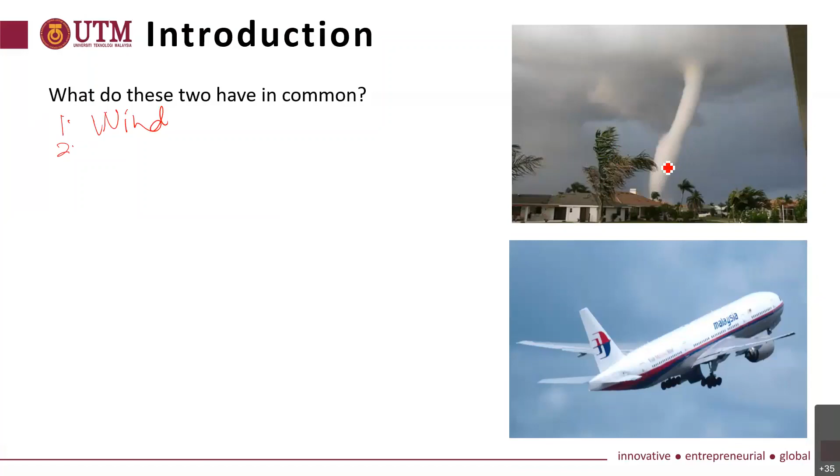Both can transport things. Izati says both can transport things. Yes, correct. Aeroplane can transport people, can transport cargo, things from one place to another. Hurricane also. It can bring boats, bring people from one place to another. Of course, we do not want that, but it can happen. So both can transport things or people.

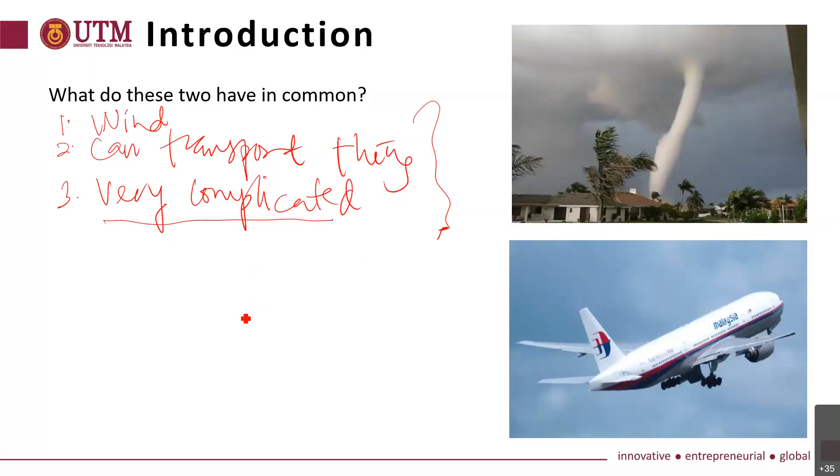Both are also very complicated. In control, if we want to model a hurricane, it will be very difficult. Of course, people are doing it. People want to predict what happens when it comes, for security, for safety. So people try to predict hurricanes. They have to model it. Aeroplane also we do modeling, we do analysis, we also do control. But as I mentioned, they are very complicated. Of course, there are many other things in common between these two. They are complicated. They are capable of transporting people, goods, and so on.

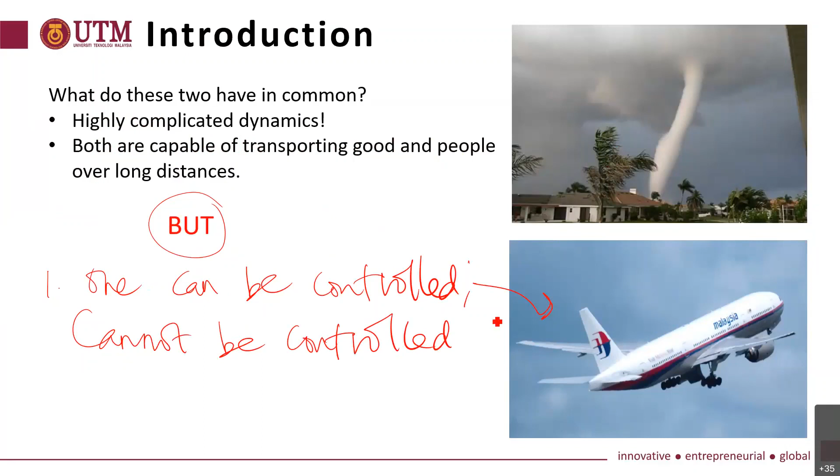But there is one big difference between these two. One can be controlled, and the other one cannot be controlled. The hurricane is God created. We cannot control it. And so this is the main difference. So if we have a system, in order for us to get benefit from the system, we should be able to control it. If we cannot control it, it can be useless, or it can be very harmful to human and to environment.

For example, another example is, let's say, power. We have power generated from many places, from solar. We have power, but if we cannot control the one that we obtain, it also cannot be used, or it can be very harmful, very dangerous to human. Okay? So some people say power is nothing without control.

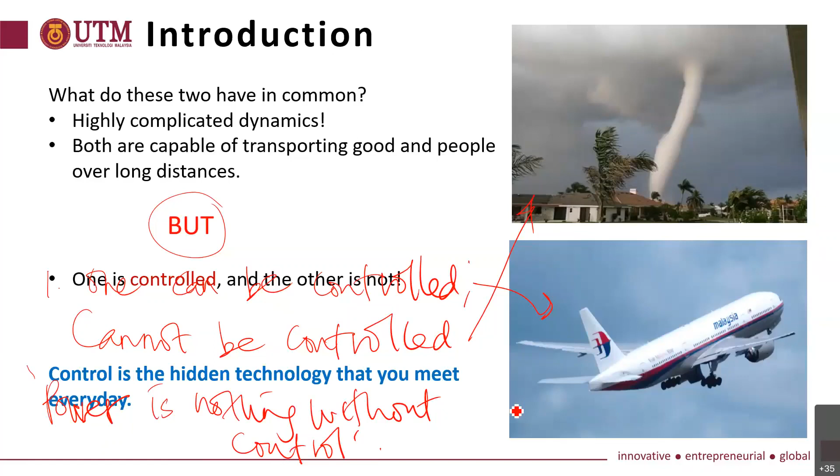Here I want to mention that power is also important. Not only the system that we develop or generate, then we need to be able to control that system. And you will see that control is the hidden technology that you meet every day. But because we meet it every day, we sometimes do not appreciate the one that we have. Okay, but in actual fact, power control is used every day in many systems that we use. Control is important, and we have it every day, everywhere in our daily life.

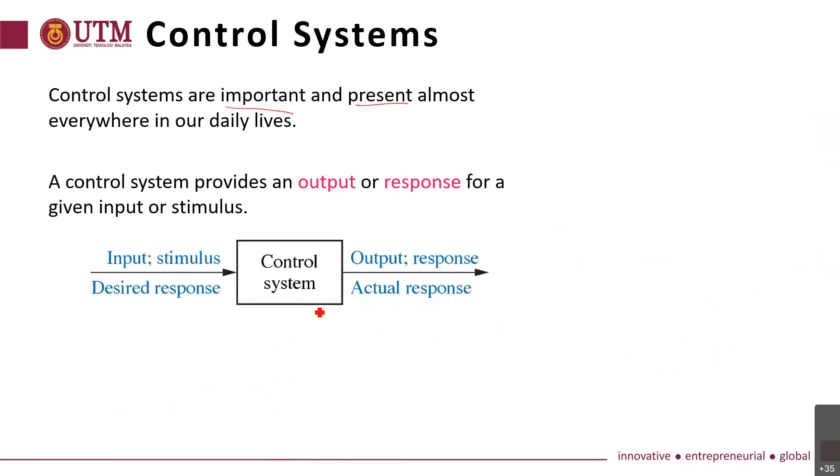The one here is the most basic block diagram. Mind you, the one that I'm discussing is the one that you also have discussed in SKEE3133. Okay. A control system is normally shown by a block diagram. Here is a system, and usually we have input and also output. Input and output. The input is also what we call desired response. Desired response meaning the one that we want, how we want the system to behave. That is the desired response.

When we excite the system with an input, we get output. The output is actually the actual response. The real one, the real response. And of course, we want actual equal to desired. Let's say I want the robot to move 1 meter. So I give input 1 meter. The robot moves, and a good robot will stop at 1 meter. That is actual equal to desired. And in that case, error will be 0.

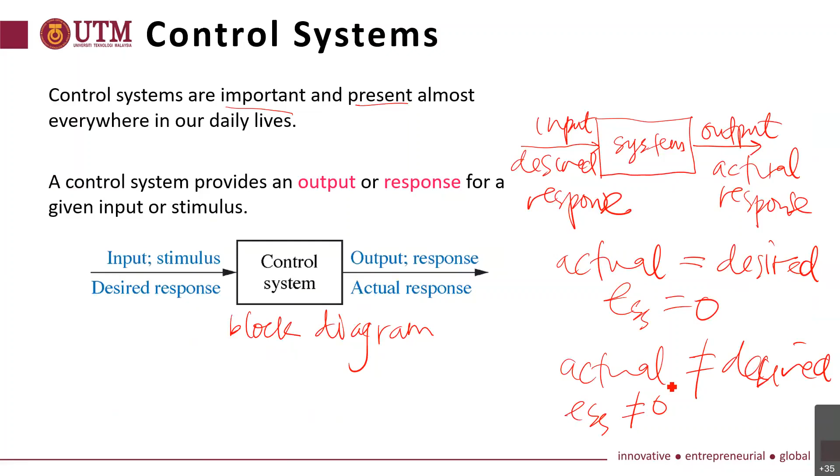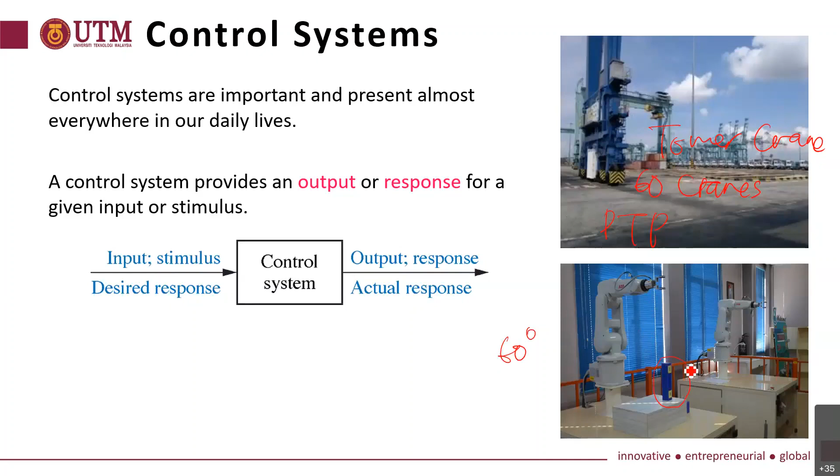And also robotics. In the robotic lab, we have robots. Robots also need to be controlled. Let's say I want this ABB robot to move 60 degrees in order to pick this material. So it has to move 60 degrees.

A good control system will make the arm move exactly 60 degrees so that it can perform the task. A not good one will be oscillating, maybe with an underdamped response, it goes to 65 degrees, then oscillates to 55, then it takes a long time to get to 60 degrees. Some other system, not good, we want 60, it moves to 50 degrees. Then we get error, and the robot could not perform the task successfully. So that is why we need control. We need an accurate control in order to perform the task.

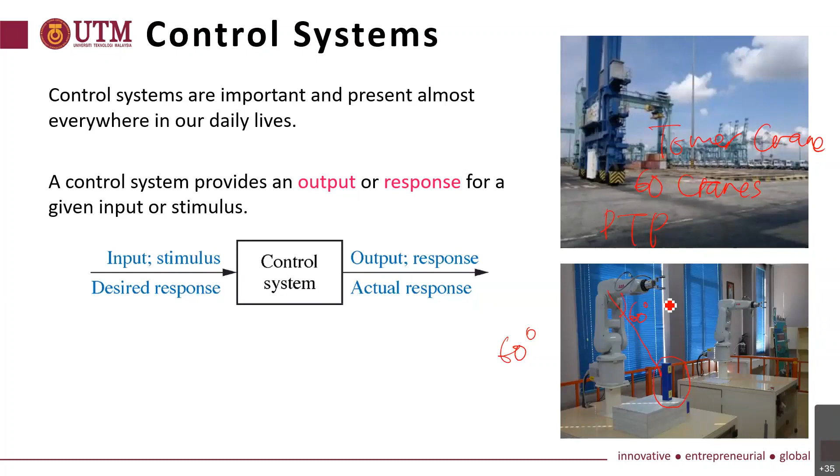Also, I think in the previous class, some lecturers gave the elevator or the lift as another example. When we enter a lift and the door opens, we normally press the level that we want. Let's say I want to go to level 20. I press 20. When we press 20, we are giving an input of 20, a step input of 20. That means I want to go to level 20.

Then the lift, from level 0, will start to move. Level 1, level 2, level 10, up to level 20, and stop. This is a very good lift. It can achieve the level that we want. A not good one will stop not exactly at level 20, maybe a bit different. Some even worse, move to another level. All those involve control systems.

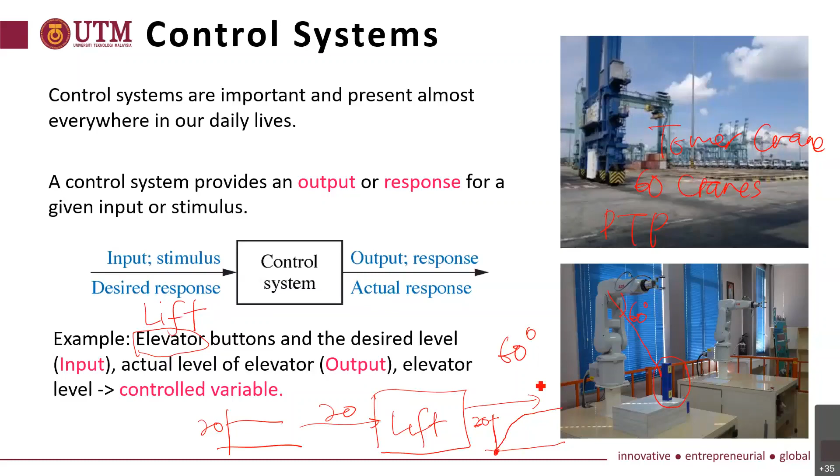And usually it is related to a motor, because a motor rotates that system. A big system like an elevator needs a big motor. A small system, a small robot, similar to the one that I showed in the lab, maybe smaller. A big crane system needs a big, high powered motor. But most of the cases are related to a motor. Of course, besides that, there are many other actuators, such as pneumatic and hydraulic, that are also related to control systems.

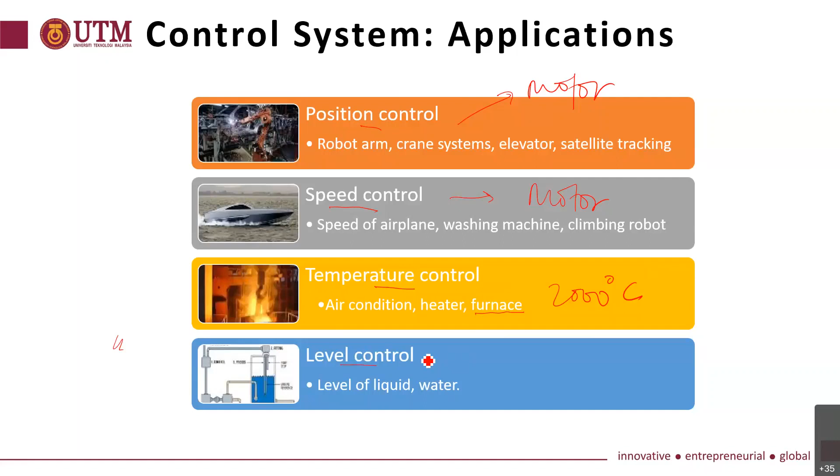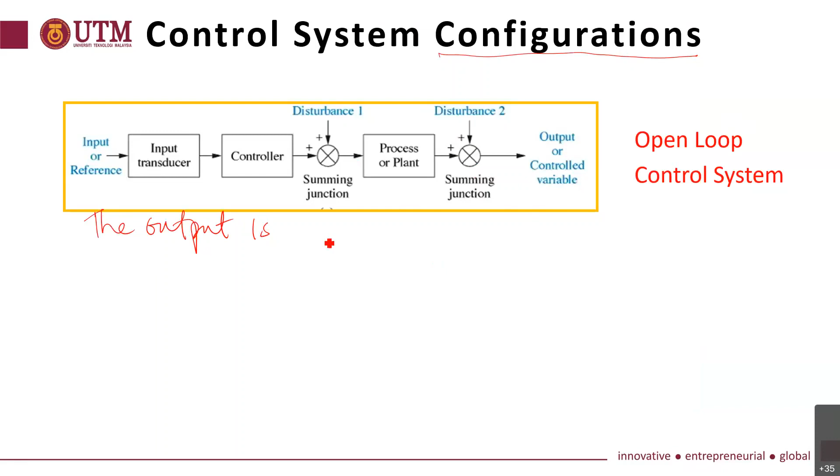Let's move to control system configuration. This is very important. The controller can be divided into two. I believe you know this: the open loop control system. This is the example that we gave in the lecture. An open loop system is one in which the output is affected directly from the input. That is one-way, straight from input to output.

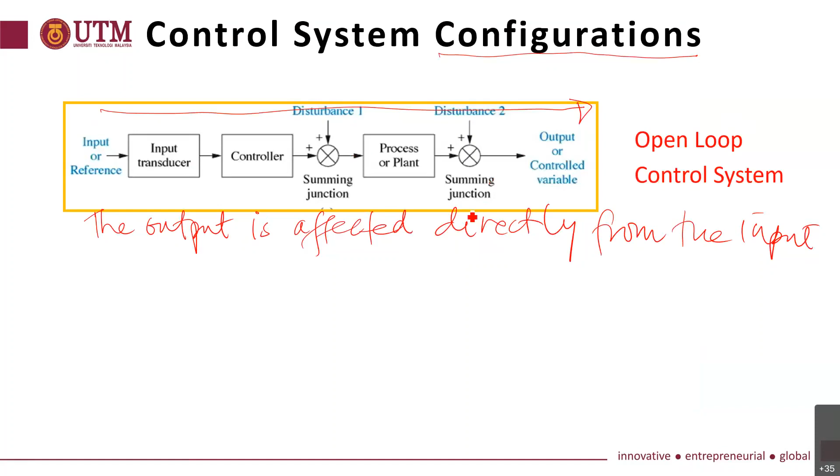If there are disturbances, in this case disturbance 1 and disturbance 2, the system cannot be modified or controlled to cater for the disturbances. So it is affected only by the input. So we call it an open loop control system. The other one is the closed loop control system, in which there is a feedback. We call this feedback from the output to the input, in order to check whether the desired response has been achieved or not. It will be modified based on what we call the error. Error is the difference between input and output. And based on this error, the controller will take action. So here is the controller. It takes action so that at the end, the output equals the input.

In this subject, in this course, the one that we will be focusing on is this block diagram. Controller. We want to design a controller so that we achieve the desired response.

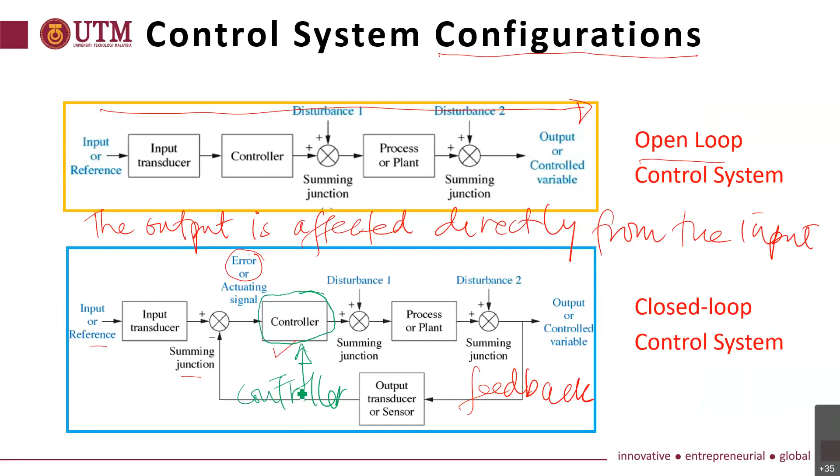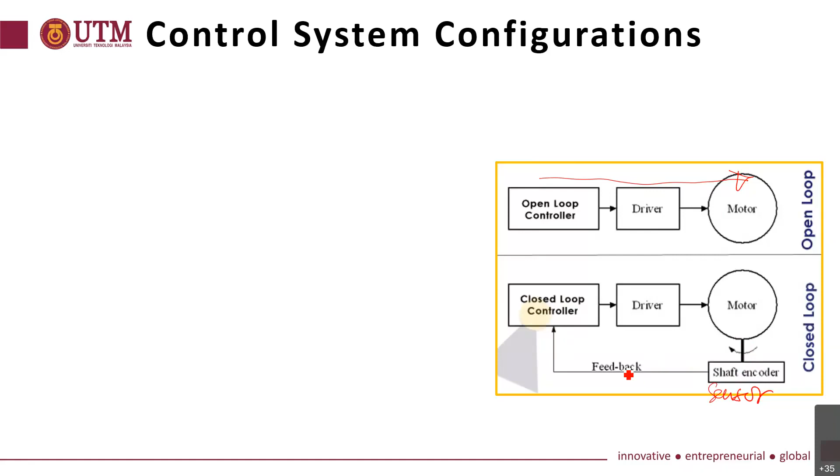In this case, they use an encoder to measure the angle of the motor, and the angle is fed back into the system, and the closed loop controller will take action in order to make sure that the actual response equals the desired response. And this is the difference between open loop and closed loop. I believe you know this.

Open loop is simple, it's cheap, but it cannot handle many complicated things, many disturbances. It is limited. In contrast, closed loop is complicated. It will be expensive as we need more sensors, more connections. It will be difficult to design. It may involve stability issues, in which the system cannot perform as what we want. But in general, they are good. They are less sensitive. They can handle disturbances, and can also be used for many systems.

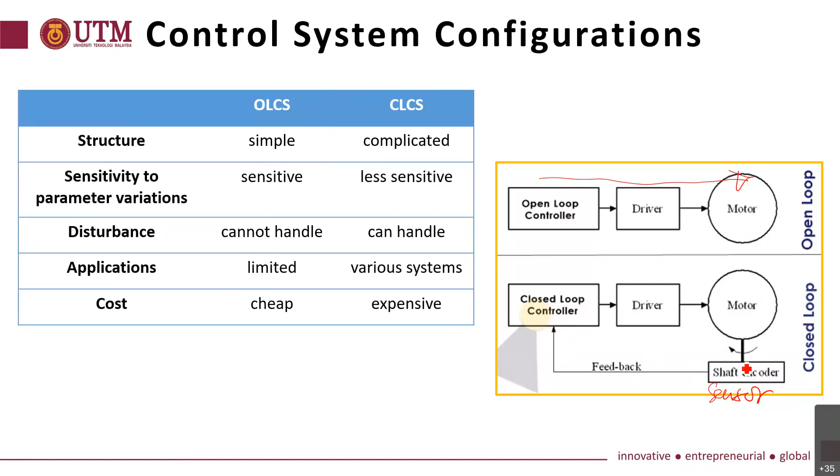Okay, let's see the specification of control systems. Control systems are dynamic. Dynamic meaning that the system is changing with time.

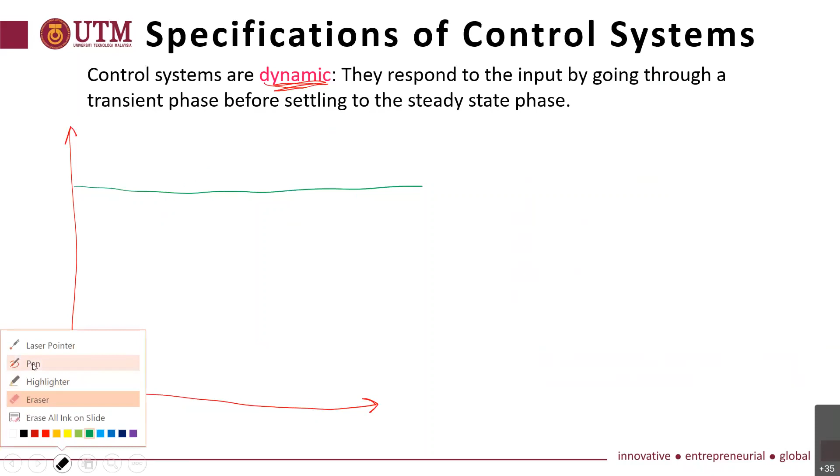If I can plot the response, let's say this is the input. Let's say we want 1. The input desired response is 1. Then this is the output. It moves from 0, increases to more than 1, oscillates, then it stops. This is the output, in time, in seconds. So this is what we call control systems are dynamic. That means it is changing with time. At 1 second, one point; at 2 seconds, a different point.

If we say this is a robot, at 1 second it moved to maybe 0.1 meter. At 2 seconds it becomes 0.3 meter perhaps. So it increased to maybe here, at 5 seconds. At 5 seconds, it moved to 1 meter. Then it oscillates, and finally it stops. So they are dynamic. Control systems are dynamic.

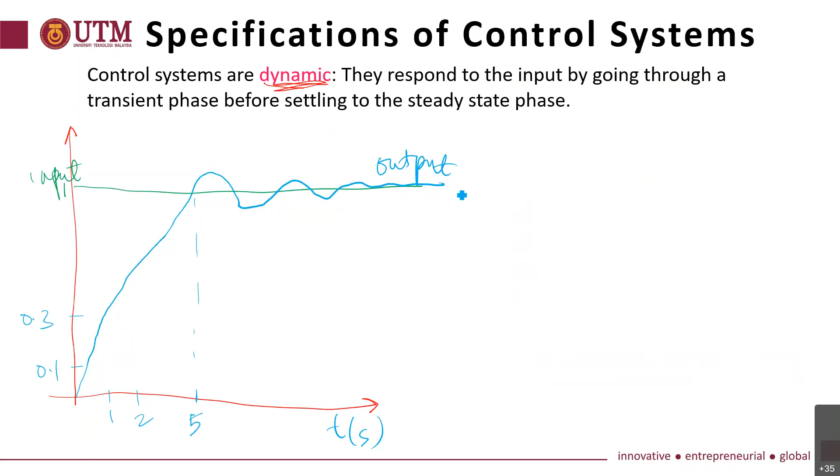Because of that, there are actually 3 things that we need to discuss related to control systems. Because they are dynamic, they go through what we call 2 phases. The first one is called the transient phase. Transient means the time to change, changing time. From here, let's say from 0 to 1 meter is the transient phase. It takes 5 seconds to reach 1.

The second part is called the steady state phase. Steady state means when it stops. Let's say it goes from 0 to 1. When it reaches 1 and stops at 1, then that is the steady state phase. And the response here we call the transient response. And here is called the steady state response. So in order to describe the robot, whether the robot is good or not, we will look into the transient response, and also the steady state response.

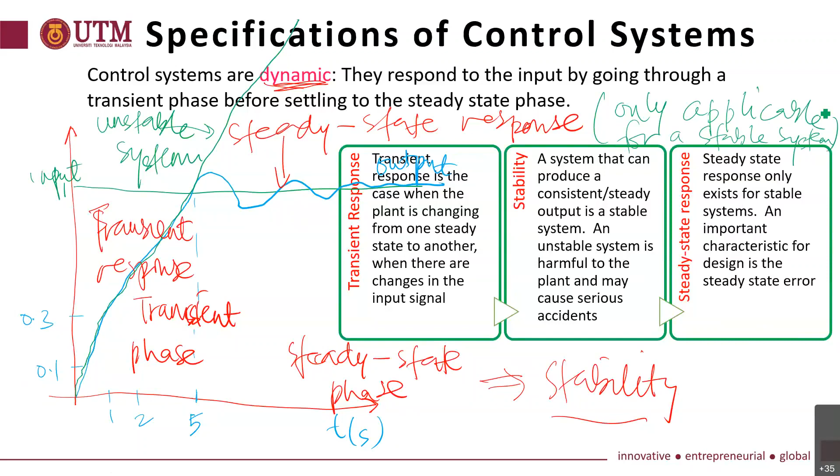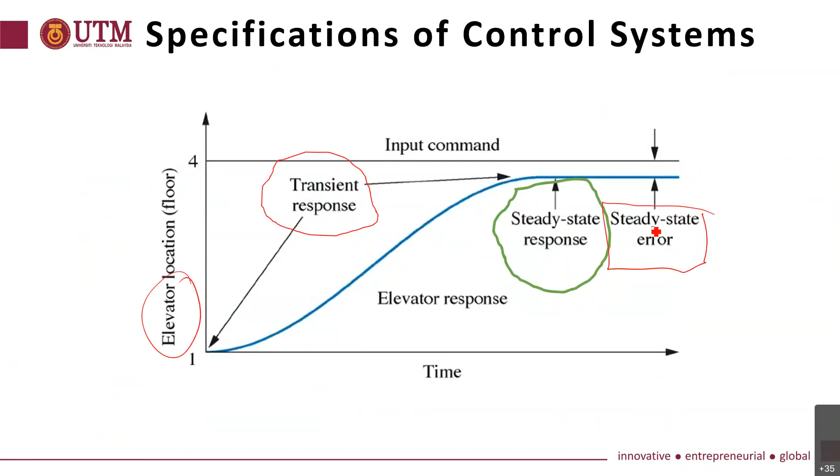This is the specification of control system, and also mentioned here in the slide, the same. Here we take the elevator as the example, transient response and steady state response. And another thing that we learned last time is steady state error. Steady state error is the difference between input and output. We want zero steady state error. We want output equal to the input.

Based on the specification we discussed just now, this is the control system objective. It's common to all systems. There are three objectives of control system when we relate to system response. First, we want a satisfactory transient response. If this is the transient response, we want a fast system. We want fast rise time. We want fast settling time. We want, if possible, zero overshoot, no overshoot. Then a system like this is good. Good system, no overshoot. It goes straight to the desired point or desired rotation or desired temperature. No overshoot. So this is one of the objectives.

Second one, we want a stable system. Of course, this is important. As I mentioned, if the system is not stable, then there will be no steady state response, no steady state error. The system will be very difficult to control. And the last one, our objective is to have zero steady state error. That means the output equal to input.

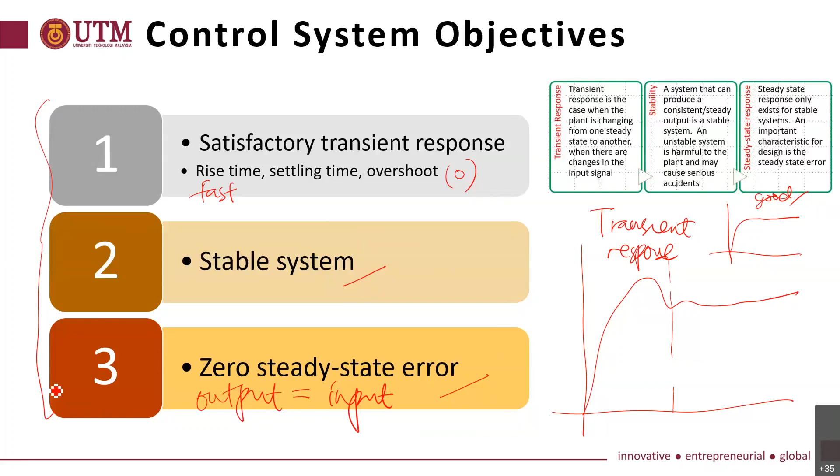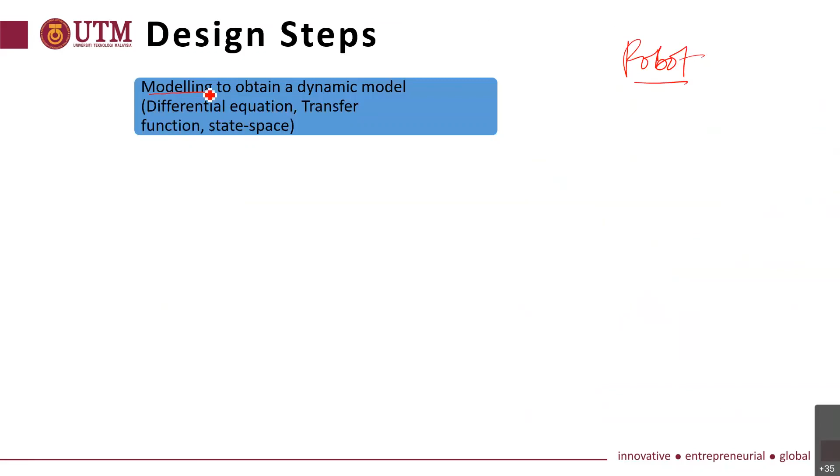Okay, then we move into design steps. How can we design a good control system? What steps are people using? First is model. Let's say I have a robot or any system, I have a power system, I have an electronic circuit. Okay, all the same. First, we will start by doing what we call modeling. We need to model the system. This is what we focused on in the previous lecture, previous course. We do modeling of dynamic system.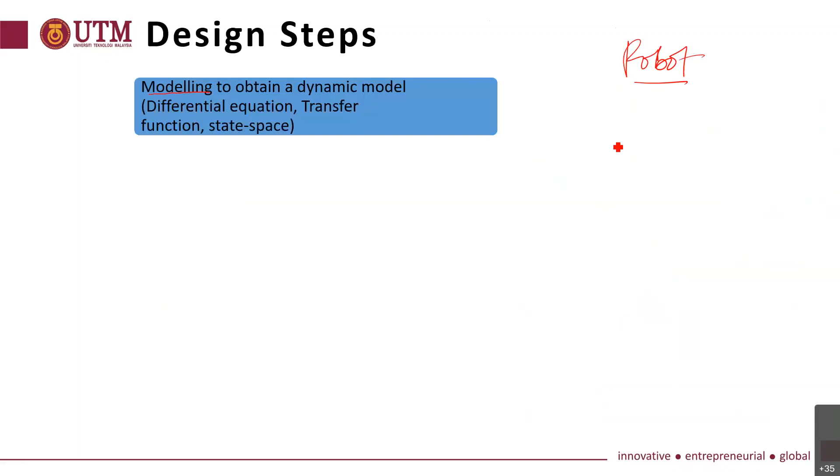What will we get by doing modeling? We get a differential equation. Remember, electrical circuit, RLC. You did model, you use Cramer's rule, but finally you get a differential equation. That is the outcome of modeling. A mathematical model, a mathematical equation representing the model. Once we get the differential equation, we can also represent it in a transfer function. In chapter 2, in 3133, focuses on transfer function. Any system, electrical, motor, mechanical system, rotational system, finally what we want is a transfer function. And also, it can be represented in a state space approach. Remember, we have x dot equals Ax plus Bu, y equals Cx plus Du. This is a state space model with 4 matrices A, B, C, D. So that is the first step.

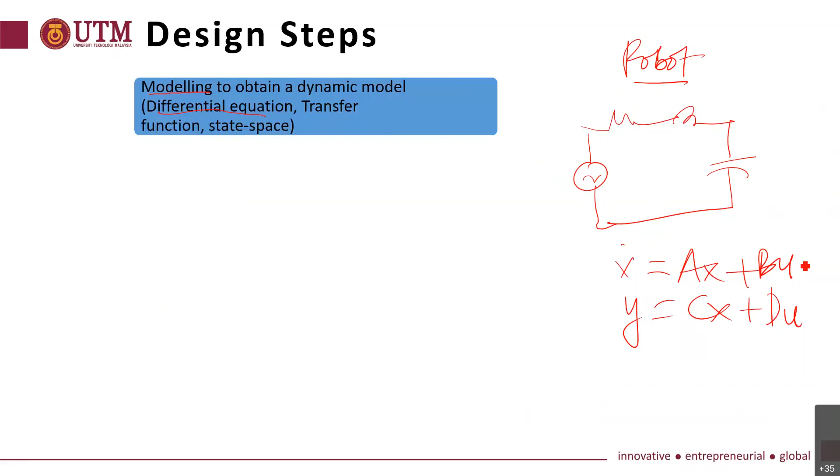When we want to control, we know the system, we study the system, we model the system. Of course, there are many techniques to model. Once we have obtained the differential equation or transfer function or state space, then we can do simulation. Now we want to analyze. We can simulate. Simulation using CACSD, meaning computer aided control system design. One of the most popular ones, of course, MATLAB. You can also use Scilab. It's free, it's open source. You can use LabVIEW. You can use many other languages, many other programs, computer programming, that can simulate the system.

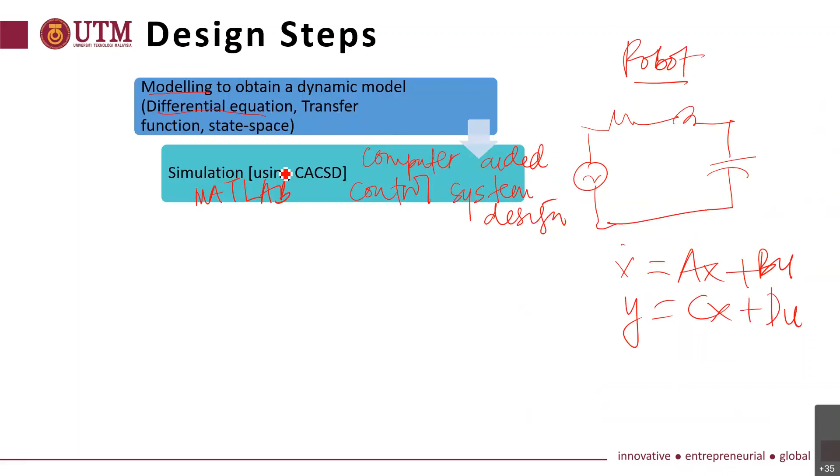Once we obtain the differential equation, once we completed the modeling, we do simulation, then we analyze. Based on the mathematics, we analyze whether the system is stable, where are the poles, how it looks like, is there error, what is the rise time, settling time. All those we call analysis in time domain. Okay, and actually there is another domain called frequency domain. Frequency domain will be covered in this course.

Once we analyze, we know the system performance, then next is to design a controller in order to achieve the desired response. If without a controller we can achieve it, then no need to do control. If the system is already good, then use that one. But if the system that we design is not able to obtain our desired response, then we need to design a controller. There are many controllers. As I mentioned just now, PID, lead lag, state feedback, optimal control, robust control, adaptive control, intelligent control, many other controllers. Of course, we cannot cover all.

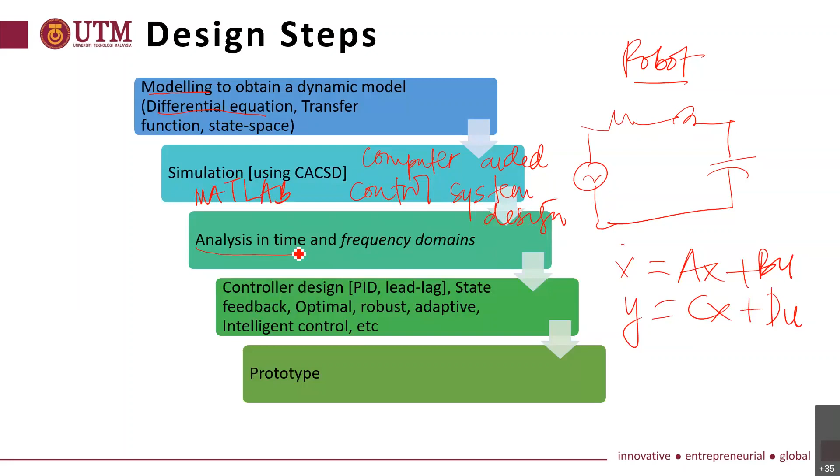And once we design a good system, a good controller, then we can proceed to develop the prototype, to design the actual system and implement the controller that we have designed. To show where we are, the first three parts until here is covered in system modeling and analysis.

We do modeling, we show you how to do simulation, especially by using MATLAB for the current project, and analysis. We show you what is the purpose of pole, zero, finding the transient response, the time, the error, the stability, all those is analysis. The one underlined in red is the one that will be covered in this subject, control system design.

Of course, there are many controllers, but for introduction to the student, we will show PID, which is in time domain, and also lead lag in frequency domain. And before that, we will also show and discuss Bode plot in frequency domain and root locus in time domain. So this is the one that we will cover, and the relationship between the previous subject and this subject.

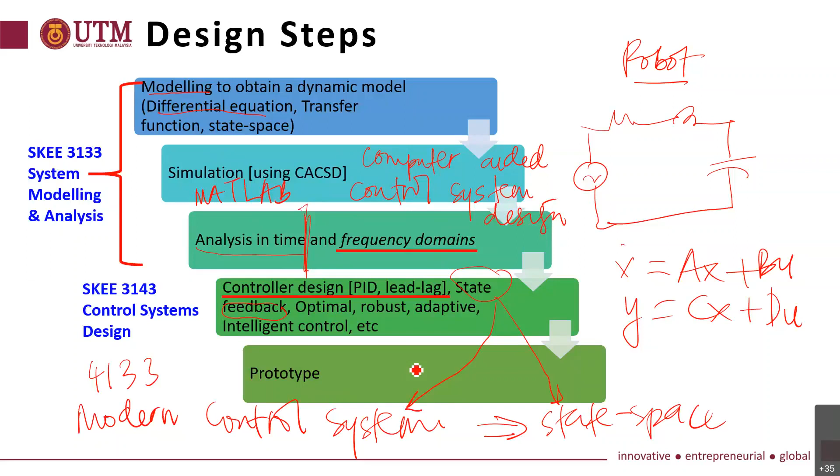In another way to show you the design step, let's take a crane. This is a crane available in the lab, a small scale crane, 1 meter by 1 meter crane. It can move in X direction, in Y direction, and also in Z direction, meaning that the length can be changed. So it's a 3D crane. Let's say we want to control this crane.

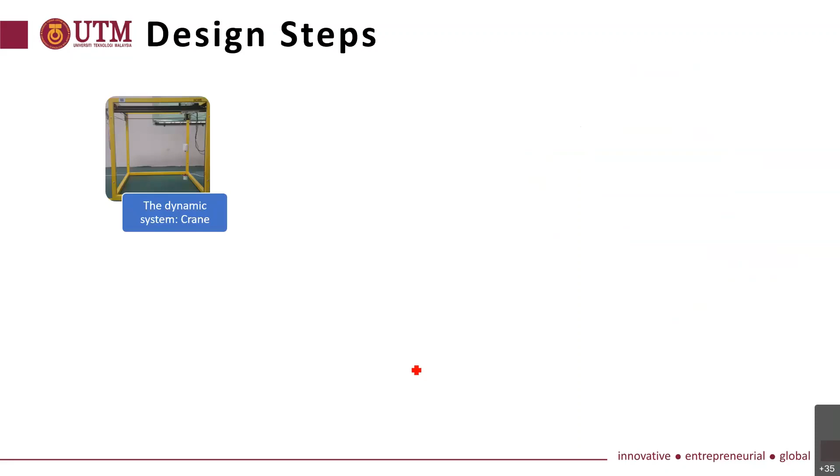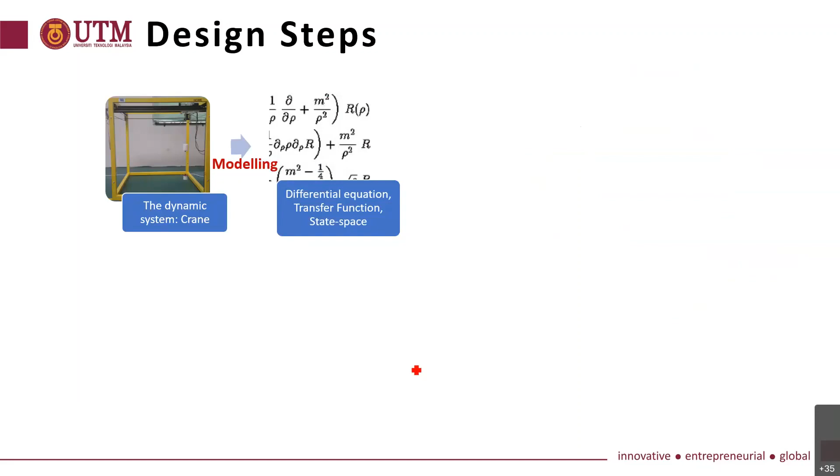First, we need to model the crane. You did it in the previous subject, you modeled the crane. Of course, a 3D crane will be more difficult because it involves more parameters. You have to consider the simultaneous movement in X and Y. So the formulation is more complicated. But still, the aim is to find the differential equation, to find the transfer function, and finally the state space model of the crane. Once we get the model, once we get the equation, we can use simulation, we can use Simulink, we can use MATLAB, we can use LabVIEW in order to analyze the system.

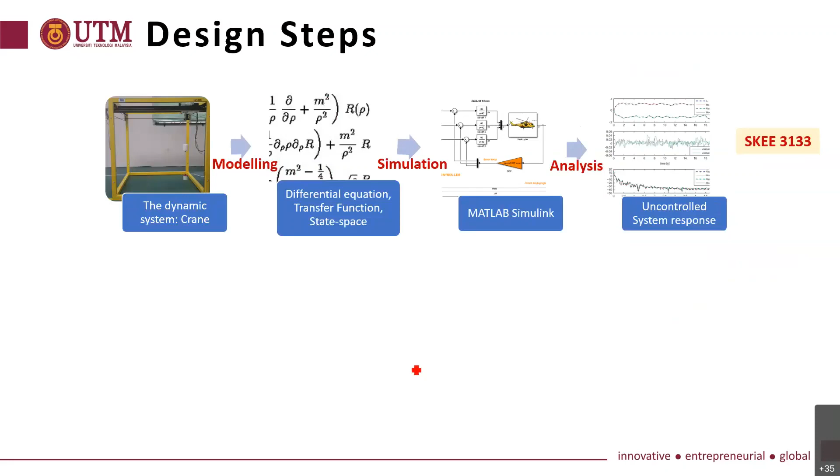In 3143, we will focus on controller design. Assuming that the performance of the system is not satisfactory, we need to improve the system, we need to make it faster, and because the oscillation of the load is high, we want to reduce the oscillation, then we need to design a good controller. For example, we want to design a closed loop controller. Again, when we design, we will get an equation, also mathematics. We get the equation, then we can again do simulation with the controller.

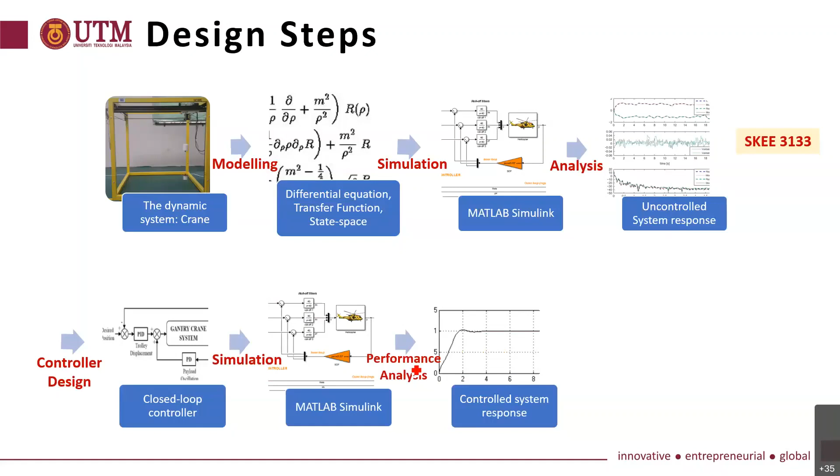Okay? We can simulate, we can change the parameter of the controller, we can change the gain, we see what happens if we use different gain. We want to find the best gain that gives the best performance of the system. Then we study. Perhaps now you see, I took this example, this is actually from the real crane. I take as example the plot of the real crane in X. It moved to 1 as what we desire, from 0 to 1. Okay. Then once we are satisfied with that, we will implement on the real crane.

Okay, so this is covered in 3143 until here. Of course, we will not be able to implement on the real system. This is an example of crane. For many other systems, of course, we are not able to continue with the experiment on the real system, but at least we will do until here. Okay, from controller design until we analyze whether the controller that we design obtains the desired response.